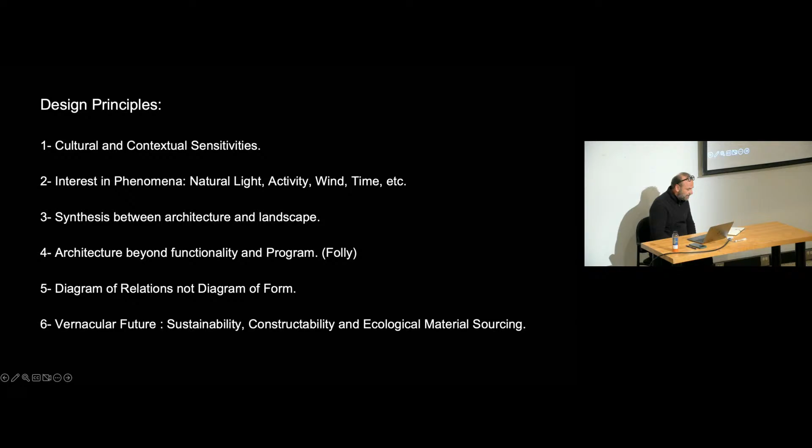To give Wetland some context, I would like to start with brief examples of waiwai works. We have 6 design principles that we adopt for all our projects. Sometimes some are emphasized more than others, but in principle, we accommodate all to a given project. I will start by giving a brief introduction into each principle and how it is implemented in a project.

The first principle is cultural and contextual sensitivities. It is important we understand our identities and our culture and how these relate to the production of space and architecture. Also, understanding the different geographies and how each have unique climates. We look at that in detail to ensure each project responds to its context.

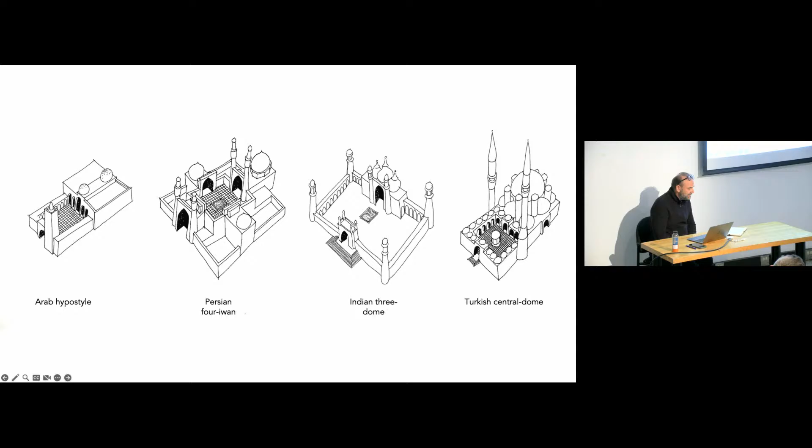Although a mosque has the same program, mosques have been designed differently in each culture. For the renovation of the Mosque of Reflection, we demolished the boundary wall and all other functions except for the male and female prayer halls. Then we introduced a riwak encircling the prayer halls and opening the mosque to the public and the neighborhood. The mosque was always a communal space and not only served for prayer.

Until today, I receive calls from the imam complaining about the neighborhood kids playing on their bicycles in the riwaq. He thinks it's a bad thing, but it puts a smile on my face.

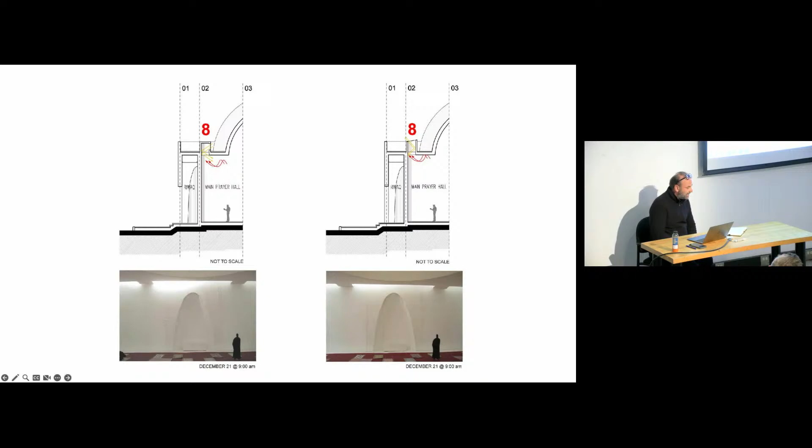The second design principle is interest in phenomena: natural light, activity, wind, time, etc. Here, we study in detail the natural light for Al-Warqa prayer hall, which is called a haram. We study the difference between high side light and top light. This study is done by physical models that we produce and analyze under the sun. We can then track the behavior of the natural light accurately within the haram space by month, day, and hour.

This is a photo of the haram naturally lit by the top light we deliberately wanted to have as a serene, homogeneous light condition that allows one to focus on the ritual of prayer.

The third principle is the synthesis between architecture and landscape. I don't see a boundary between the two disciplines. The painting by Pieter Bruegel, titled Play of Kids, as well as the souk photo from Jeddah some 100 years ago, were the source of inspiration for the design of Hayy Jameel in Jeddah. Both offer a space of gathering and play, bringing people together. The building is designed around a single courtyard that brings the multidisciplinary design program together, forcing them to speak to one another.

It also offers a space to host music festivals, an outdoor cinema program, etc.

The fourth principle is architecture beyond functionality and program. It is important to think beyond the pragmatic sense of architecture.

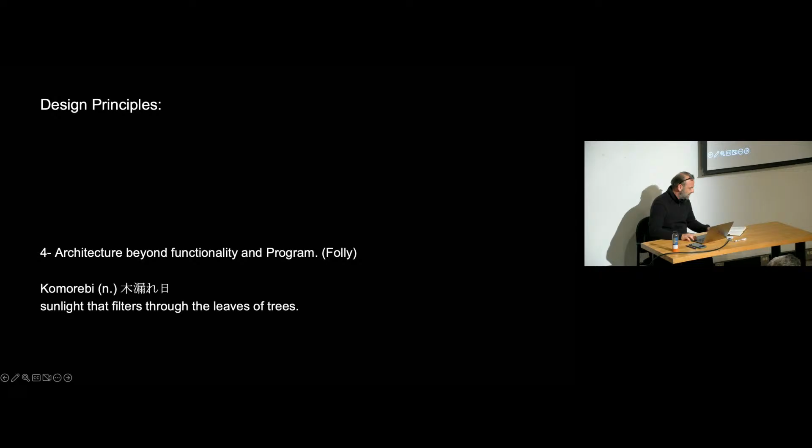This was a competition proposal for the Beirut Museum of Modern Art. We proposed semi-outdoor exhibition terraces inspired by the Japanese word komorebi, meaning the sunlight that filters through the leaves of trees. This was not a requirement in the brief, but we wanted to propose a naturally lit new space for the exhibition of art.

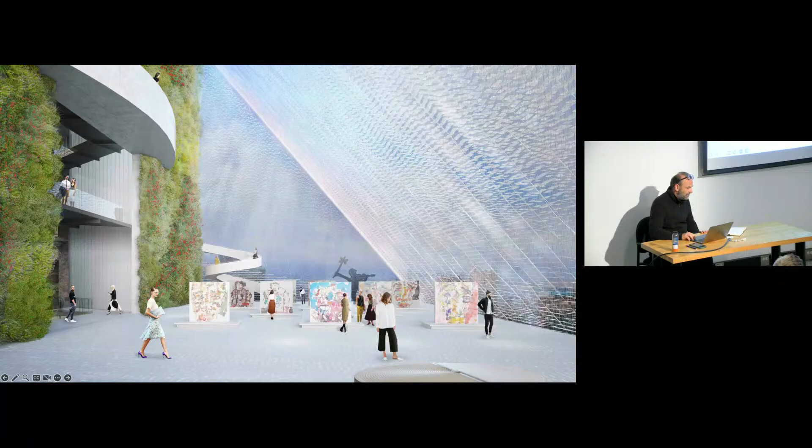We believed this was a very contextual proposal to Beirut. For those of you who know Beirut, it screams concrete. We thought in 2016 it was time to interject a new building typology, one that is light, transparent, and open. Unfortunately, we were so wrong given the tragic explosion on August 4, 2020.

The fifth design principle is the diagram of relation, not the diagram of form. We do not start with a form and then try to fit the program into it, but rather we start with relations, asking ourselves how we want the activity to be within the space, how this building will relate to the context, etc.

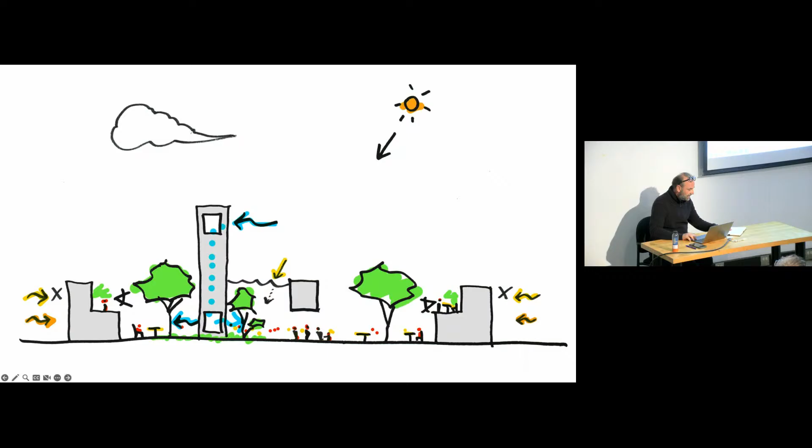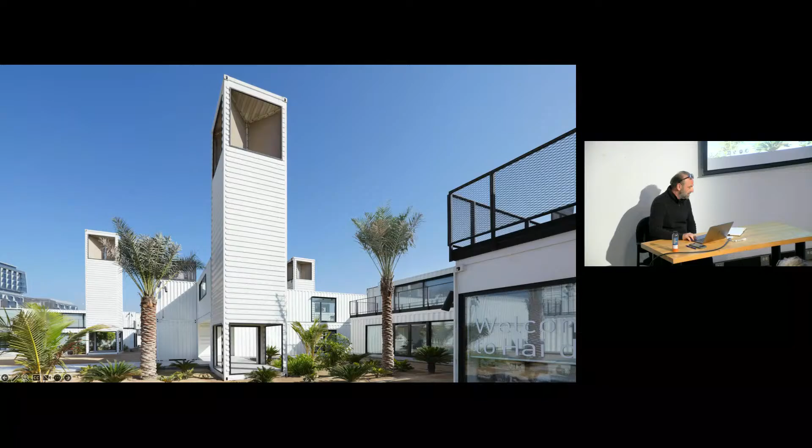Here I show Hai d3, built from 82 shipping containers with no additional steel reinforcement. The client wanted a 3-year temporary building, and Dubai is home to one of the largest shipping ports in the region, with hundreds of containers being commissioned yearly. The project was completed in 2015 and is still standing today.

The sixth and last principle, vernacular future, is about sustainability, constructability, and ecological material sourcing. Here I will move to present Wetland, which was presented at the 17th Architecture Biennale. I must point out this is an ongoing research project; the Venice exhibition was only a pit stop.

When Hashim asked the question, how will we live together, as practicing architects desperate to build sustainably, we wanted to address the relationship between us humans and our planet Earth. As Hashim once said in an interview, we wanted to bring a multicultural and cross-disciplinary dialogue that is up to par with the Mos Eisley Cantina from Star Wars.

But with the postponement of the Biennale by one year, the Curators Collective was born, through a call that the Korean curator initiated for all National Pavilion curators to meet on a Zoom meeting. And from that meeting, another project was also born, titled A Bench in Venice.

A Bench in Venice called for students around the world to design an upcycled bench using the 17th Biennale of Architecture installation's leftover construction materials.

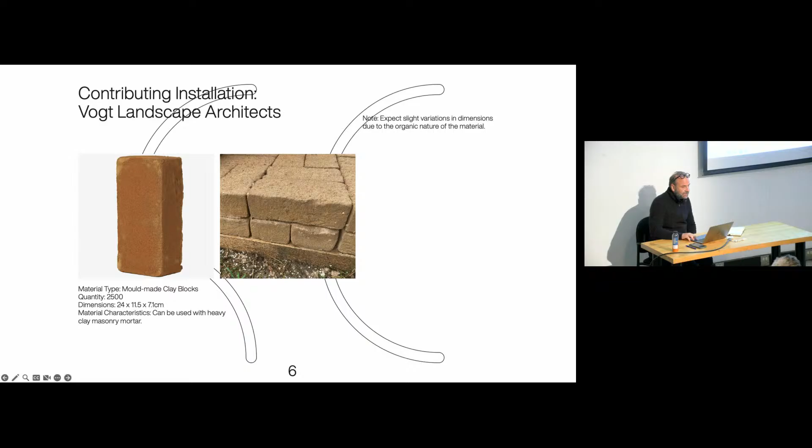For the first time in the Biennale, a cross-national pavilion project was realized, thanks to the support of Hashim Sarkis. We collected materials from different pavilions: wood and salt brine blocks from the UAE Pavilion, wood from the Japan Pavilion, canvas from the Canadian Pavilion, and clay bricks from Vogt Landscape. These were part of the catalog of materials included for students to use.

We received 136 submissions from 36 or 38 countries, and we exhibited all their works within the UAE Pavilion, as well as realized the 3 winning benches.

One was put on display in the UAE Pavilion, one was exhibited outside the Spanish Pavilion, and the third was exhibited in front of the Japanese Pavilion. This was the first time that multiple national pavilions came together to talk to one another and realize a project not initiated by just one national pavilion.

Now we move to Wetland. Why Wetland? During the course of this presentation, you will understand why the title of the exhibition was Wetland, in Arabic reading Ardun Ladina. Today we live on an Earth with a population of 7 billion people, and it is projected that by 2050 we will grow to 11 billion.

A Bill and Melinda Gates Foundation report in 2019 states that we will have to build the equivalent of 1 New York City every month over the next 40 years to meet that growing demand of population growth. The question is, how will we do that knowing that we are already in a state of climate emergency?

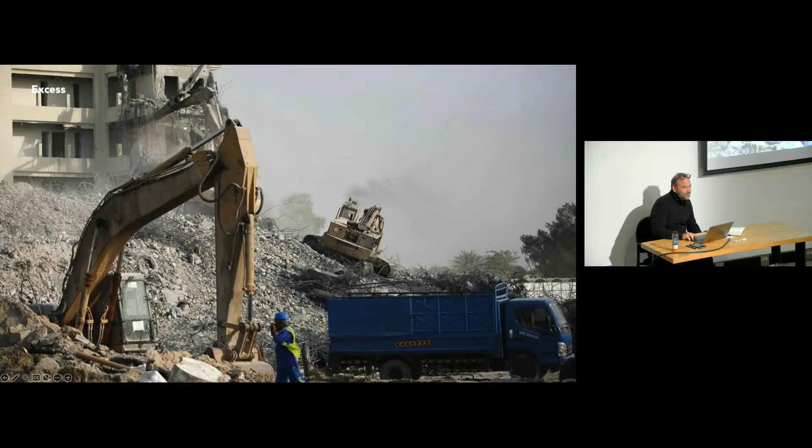Energy: the construction industry is responsible for 36% of global energy consumption. 86% of that still comes from the burning of fossil fuels, and 14% comes from renewable energy. Excess: we are responsible for 40% of global waste. As Dr. Philip Block states, 40% across the whole board.

The modern architect was not challenged, I believe, with this issue of the climate crisis. It is a recent phenomenon that is put against the 21st century architect to probably challenge.

But while I was curating the UAE Pavilion, I came across this article that was published in Domus magazine that caught my attention, and it was a letter written by Jacques Herzog to David Chipperfield, who was at that time the editor of the magazine.

He wrote: "Dear David, you asked me what we architects should do about the unmistakably impending environmental catastrophe, about social inequality, about poverty, about the degradation of the planet's resources, about the pandemic, which has placed us in an almost surreal mode that begs description, all of which is being managed by political leaders whose cynicism and absurd actions put the Marx Brothers to shame. Dear David, the answer is nothing."

So I came to ask myself, who is this 21st century architect and what is my responsibility?

Others responded in the Venice Biennale by returning to vernacular architecture as well. The Philippine Pavilion proposed a pavilion built from sustainable wood under the concept of mutual support, and so did the US Pavilion. But in the United Arab Emirates, the vernacular architecture is built from corals. So for me to go back and use coral to avoid using modern material is impossible. It was okay probably for a few hundred people, but today the UAE population is at 10 million people and growing at a tremendous rate.

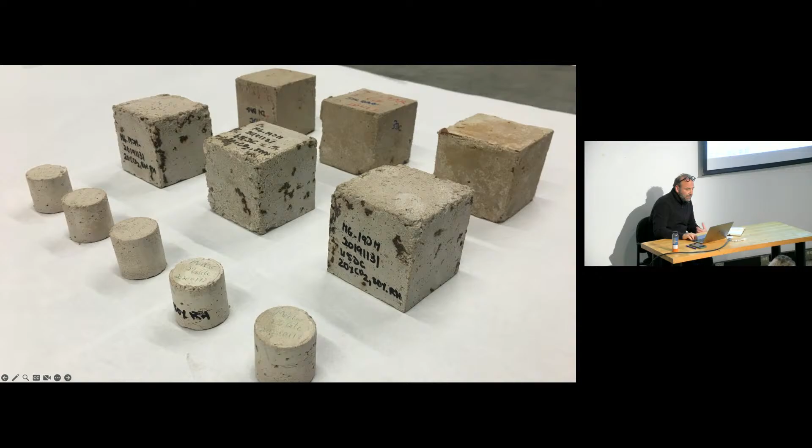But through our initial experiments, we quickly learned that, of course, this material works in compression, but it is very weak. And through experimentation and the support of the lab, we learned that the material needs to absorb CO2 in order to gain its structural strength. It will absorb 18% of its weight in CO2, and that is called a carbonation process and will give it its strength.

It's not a fancy process. It's simply exposing these prefabricated modules to a carbon chamber. It could be as easy as a block put into a plastic bag that is also filled with CO2 and left for 72 hours to carbonate.

I'll show you a simple video that shows one block non-carbonated, one block carbonated. The test was done at the factory in Venice because all the modules and units we produced were in Venice, to test what the results were. You can immediately tell the carbonated module that does not break versus the non-carbonated module that completely shatters.

Now, after having come up with a material that is magnesium oxide cement, we had to go and present in Venice. We didn't want to only present a modern material, but we also wanted to re-question modern methods of producing space and architecture. Hence, we started a collaboration with the University of Tokyo in which we wanted to have an homage to the coral architecture of the UAE.

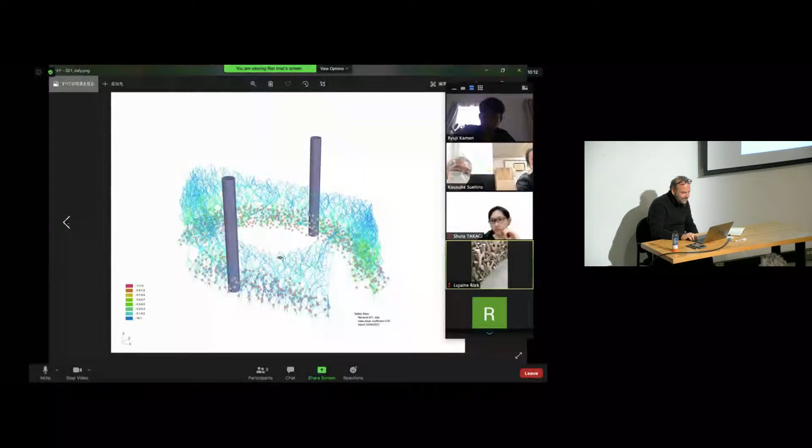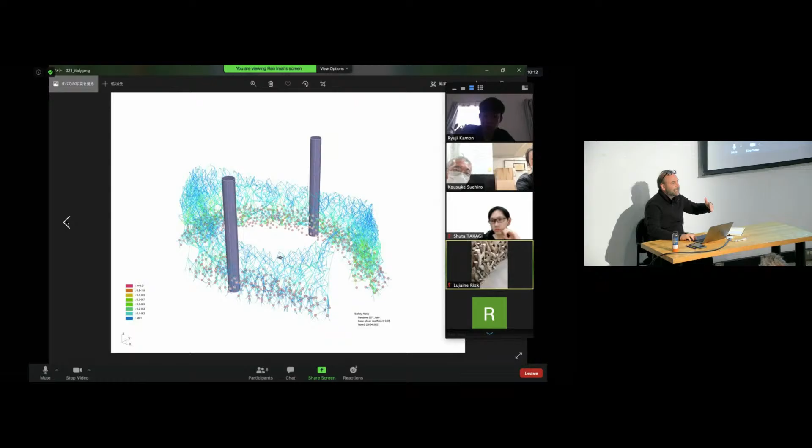And you see here, the points are scanned, uploaded. We'd have Zoom meetings. You can see Sato Sensei there, the structural engineer at Tokyo University, confirming the integrity of the structure and giving us the go-ahead to start building the second structure, and finally having a structurally verified model that is submitted to La Biennale to allow us to open the pavilion to the public, because before that, there is no way you can open it to the public without this assurance.

Finally, the pavilion was built from 2,400 modules, all assembled, I would say, through conversations. And we also commissioned Farah Al-Qasimi, an Emirati artist based in New York, who took amazing photos of sabkhas in the UAE that capture the tension between landscape, the natural, as well as the industrial grid above. And you can see in the background the desalination plants and the oil rigs that are competing with this living landscape. Because sabkhas are living landscapes, they're constantly shifting because of the movement of underground water.

Final slide. I would like to present to you an audio, commissioned by us and done by Lawrence Abu Hamdan. The audio speaks of the life of Artemis, which is a shrimp living in the Arabian Sea. I've overlapped it with a time lapse of the assembly of the pavilion just to make it a little bit more lively.

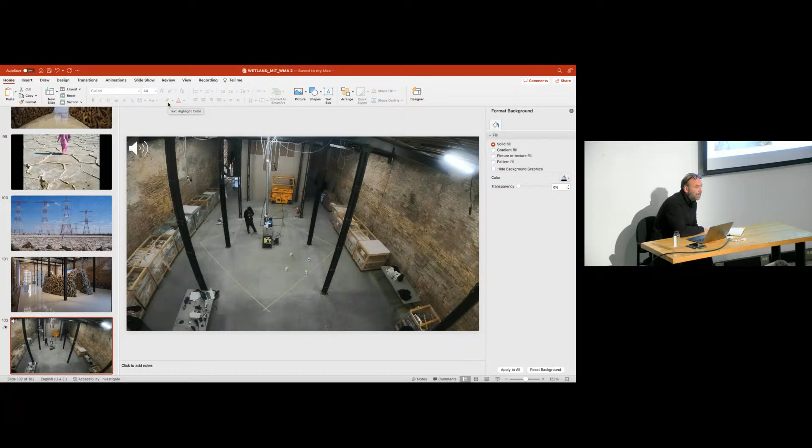Thank you. Finally, I ask the same question I asked at La Biennale, which is, can industrial wastes produced by our cities be the future vernacular? Thank you.